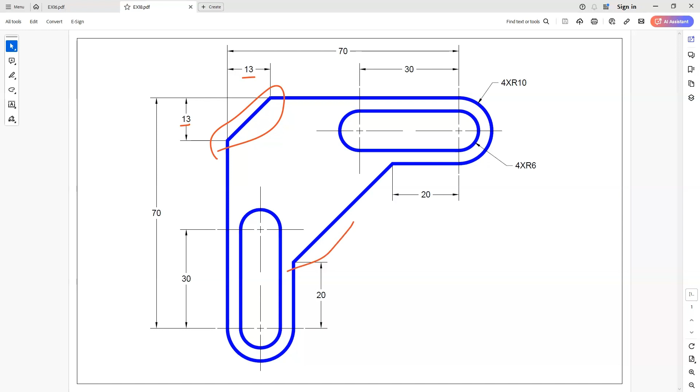Okay, so you can see that this chamfer here along the top is going to be really straightforward. There's no kind of thinking required for this one. It's just a simple chamfer, and we do have both of our numbers, 13 by 13. Now this chamfer, we're going to have to figure out a little bit of math to it. But don't let this scare you.

So we know the overall distance here is 70, right? We know the total length from this circle all the way to here is 70. So we figured that part out. The next thing we need to do is take a look at this number. So that's going to get up to here. So I have a minus 20. Okay. The last thing I need to do is figure out how far is it from here going up to here.

Well, if you're taking a look at that, that's going to be nothing more than the number that goes right across here. This has some kind of special thing to it, right? This happens to be the diameter. Now, they give us the radius here. So if we have a radius of 10, remember that the diameter is double the radius. That means that this number that goes across here should be 20.

Okay, so if we take this number here, and then we also subtract it from here, that should give me 20 minus from here. And once again, I apologize for my writing with this. It's kind of hard to write with a mouse.

But 70 minus the 20 here and minus another 20 should give me 30. So that tells me that the length from here going straight up this direction is 30. And it's also going to be the exact same thing going this direction. It should be 30 as well. We can do the math on that if you want to go through it. But it's simply just this 70 at the top, I have a 20 here, and then I have this same length that's going across here, right?

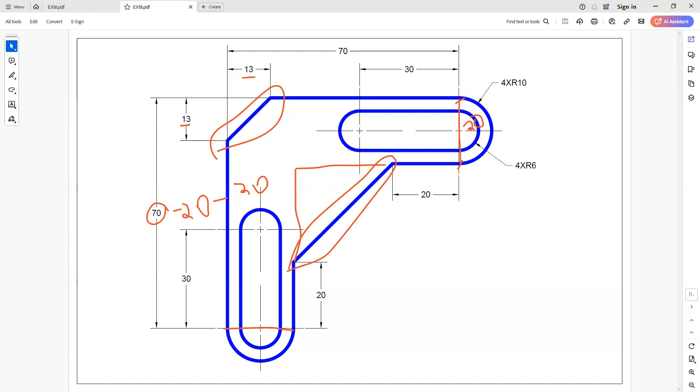So with these numbers already figured out, it's going to make it super easy for us to do in AutoCAD. So let's jump over there. All right, so here in AutoCAD, let's make this super simple. I'm going to start by creating a line, and I'm going to click here, and let's do some of the normal stuff. Now, I purposely started this line command just to show you that sometimes you can do the normal stuff while you're in the middle of a command.

So right now, I'm wanting to go up. I can turn the grid off here, and it's still not going to affect the line command. I can turn my ortho on. I'm sorry, I turned polar tracking on. So I can turn the ortho on, it still keeps me in this command, and you can see it here on the command line that it has grid off, polar on, polar off, and things of that nature, right?

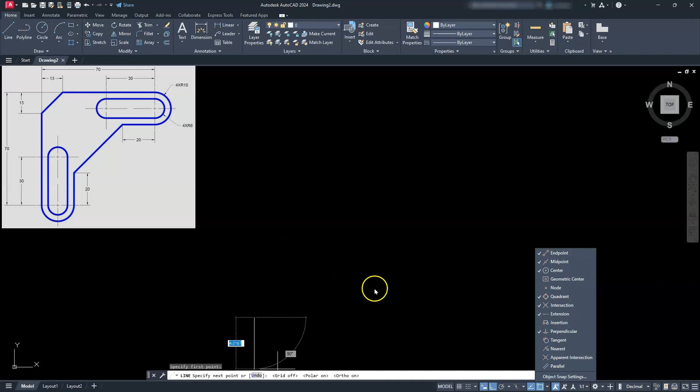And then I can check my running O snaps. These are the running O snaps that I'm going to use. Now, in order to get rid of this, don't be afraid, just click back in your screen. It won't end that line for you. Now facing up, I'm going to type in 70 and hit enter. This is going to run off the screen, so hit the escape button. And then what we're going to do next is zoom the extents.

And then I'm going to scroll backwards on my mouse. All right, move this over a hair. Let's go back to the line command. I'm going to click on this endpoint. I'm going to come this direction, 70.

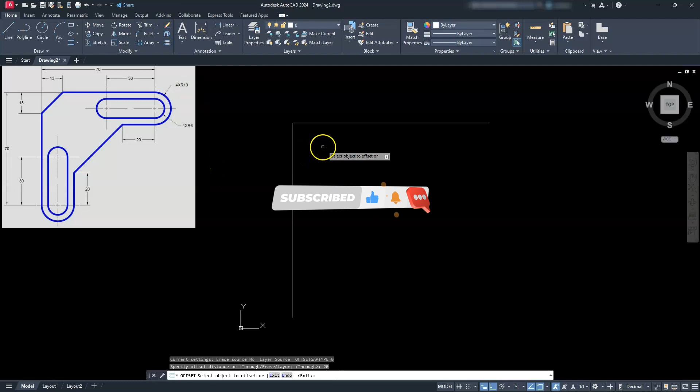All right, next I'm going to do some offsetting. Remember that diameter that we figured out before. Let's use that as the offset distance. So let's go to offset. That number was 20. Let's go ahead and offset this line going down here, and then this line going this direction. All right. Then I'm going to put the arcs that are on here.

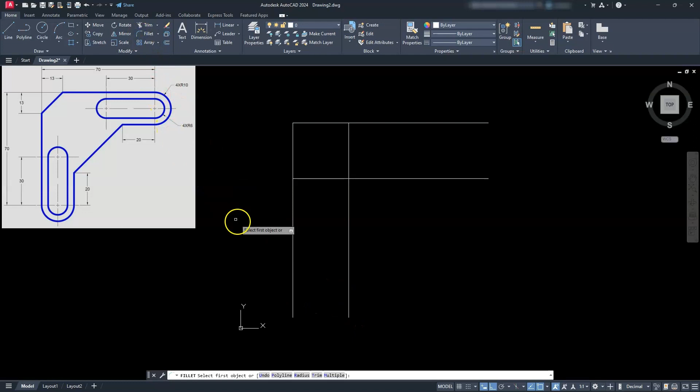Now, we don't have to use the arc command. Remember that anytime you have parallel lines to each other, the fillet command will also go ahead and put a tangent circle right along this. So if I go to fillet, and notice that I'm not going to put any radius or anything in there, I'm just going to tell it that I have multiple. Then I'm going to select these two lines and these two lines. All right, let's go ahead and escape.

Let's go ahead and put our chamfers on here. And the first chamfer we're going to do is this from the back. So I'm going to go to the chamfer command, distance, 13, enter. And by default, it's going to keep that same number as 13 as the second one. So I'll just hit enter. Then I'll go ahead and do this chamfer.

All right, so let's go ahead and take a look at the next one, right? So I'll go back to the chamfer command, distance, and this is that number we figured out before. I'm going to type in 30, and it's going to be the same for the other distance, so 30. And then I'm just going to do these two lines.

All right, next thing I'm going to do is go ahead and create that circle here. It has a radius of 6. So let's go to circle, center radius. I'm going to go to this center, kind of give me a little preview of it. Go ahead and type in 6.

And then I'm going to copy this over this way, a distance of 30. So I'm just going to use the copy command. Select this circle. Go ahead and hit enter. Since I'm going at a distance, the base point is irrelevant. So I'm going to select down here. As long as I'm dragging this direction, I'm going to type in 30.

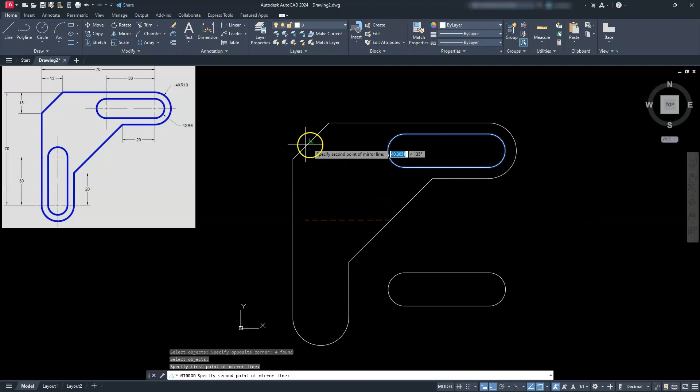I have one more command to use. So let's go ahead and use the mirror command. I'm just going to put a window around this stuff here at the bottom. So I'm just going to select it here. Go ahead and hit enter. And then the axis, or the line of symmetry, is going to be from this midpoint going to that midpoint. Go ahead and hit enter. And now you see that this part is done.

So we did a lot of the work up in the front of this one, just figuring out the chamfers. And you can see that everything else can kind of flow. One of those neat tricks that I do like to show you is that with the fillet command, if you have two lines that are parallel to each other, there's no need to even try to figure out the radius or do an arc or anything of that nature. It's a lot easier just to go ahead and use the fillet command and go right across, and AutoCAD is smart enough to figure that out.